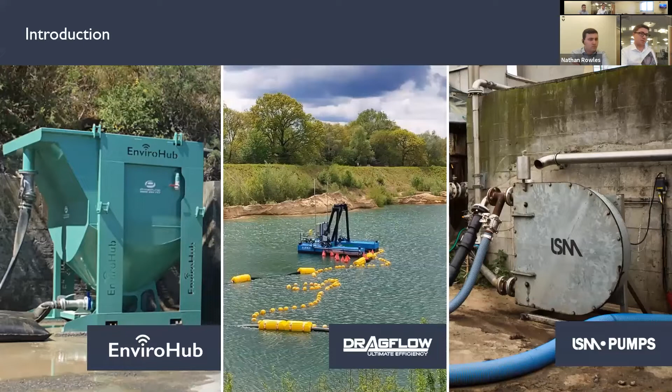So without boring you, we're just going to very quickly run through how you specify a pump. The reason we find this important is a lot of you are in a position where you go out to suppliers and make a request for a pumping solution. It's really important that you understand some of the terminology they might come back with and some of the questions they might ask, so you can understand why they're important.

Any quarry application, and I think we're in North Wales today, you've got a lot of hard rock, plenty of dewatering to be done. Pretty much any quarry, there's some movement or transfer of water, whether it's for processing or for emptying the quarry to keep it dry. But all that water, despite it being defined as clean water, is not clean.

I think we had an instance once, a quarry fitter was trying to explain to one of his colleagues how what was called clean water was actually dirty on a quarry site, and his mate refused to accept that this water was dirty because it looked clean. And I think he eventually told him, right, okay, you've got a lovely BMW M4. Why don't you pop your so-called clean water into your washer and see how you get on. And once that little experiment had taken place, it was proof that no water is clean in the quarrying industry.

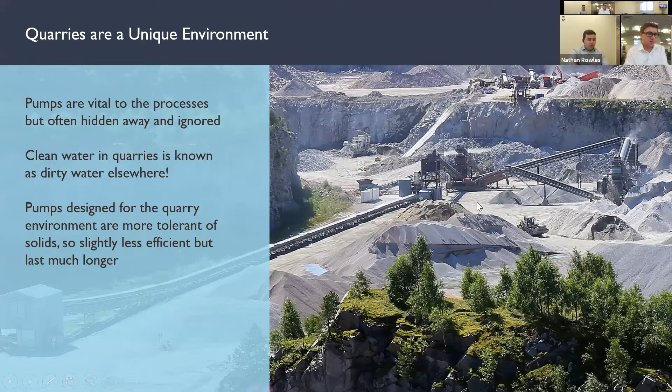There's a lot of suspended solids just from yard runoff. It may look clean on the surface, but it may just be the 10% at the bottom that, once it gets stirred up, causes the problems. But then that's the case for having the right tool for the job. It's not unmanageable by any means, it's just ensuring you've got the right tool for the job. Agreed. So with that in mind, we're going to run through quickly some general pumping principles.

We've got a very simple diagram here. On the left-hand side, let's imagine the grey area here is a lagoon or source of water. On the far right-hand side, let's imagine that's a wash plant, for example. And this is the route for the pipe run between.

One thing worth mentioning is why we run through these questions. When you ask for a freshwater pump or dewatering pump, even if we have the model number of the existing application, we're not necessarily able to just specify products based on the existing specification, because different pump models differ massively.

So we like to do this process every time. That's a really important point. So we've had instances in the past where a pump has failed on site, and the previous pump may have lasted 10, 15 years, and we go in and replace it in our innocence with a replacement pump exactly the same as the pump that's been there previously, and it only lasts 6 months, and we start to get very wound up about our quality, etc.

And then we do some more digging and realise that actually the pump had recently changed its duty or application, and the pump was no longer fit for that revised duty or application. So it's really important to go through these questions every time you do a pump, just in case something has changed.

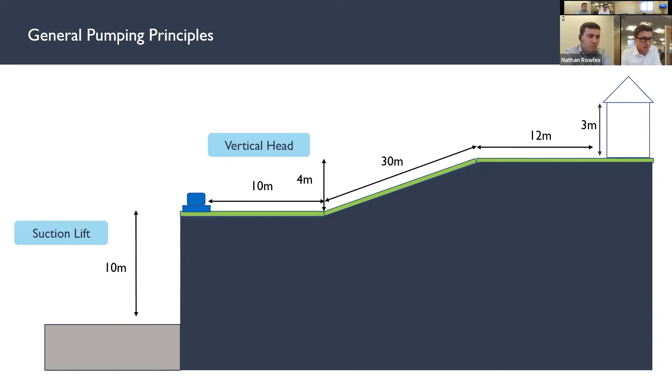So some important words and terminology that will be asked of you when you're specifying a pump. First of all, suction lift. That's the distance between the level of the pump and the level of the water. Vertical head is the vertical distance between the level of the pump and the highest point in the line. And pressure, obviously, is the pressure required at the outlet. In most cases, it's like spray bars firing onto a screen or dust suppression or something like that.

So first thing to point out here is that we put a very simple little pump there on the left-hand side, but that's not going to work. A simple rule of thumb is that any pump cannot prime greater than 7 meters. In reality, more like 5. The laws of physics say 10, but between 5 and 7 meters is the maximum you can prime in any given circumstances. So in this instance, we're going to have to put in a submersible pump, because obviously a submersible pump is submerged, there's no need to prime.

I'm just going to run through some calculations here. So the important question that you're likely to be asked is, what is your total dynamic head, or TDH? And TDH is the combination of the vertical head, so the difference between the level of the pump and the highest point in the line, the friction loss, which is the back pressure created by the movement of the water or slurry down the line, and then the pressure at the outlet.

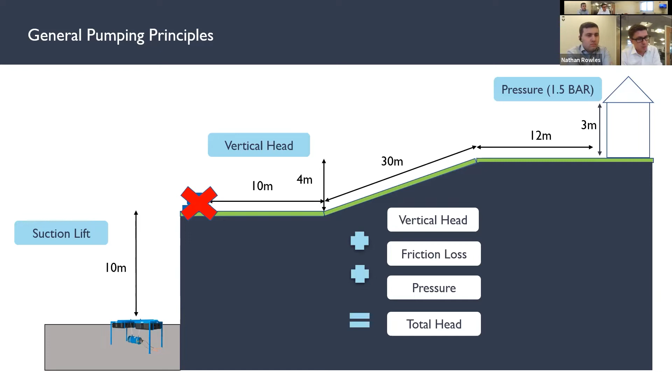That pressure point is really important because oftentimes on a sand and gravel site especially, or if you're washing quarry dust, for example, it's often forgotten the pressure that's required at the spray bars. And that's really important. A wash pump wouldn't obviously work without that. So total dynamic head is the combination of those three things. And we're just going to walk through the specifics here in this example you can see on the screen.

So vertical head is 17 meters in this instance. You've got the 10 meters up from the water level, another 4 meters up to the highest point, and 3 meters up to the top of the plant. Friction loss. There are plenty of online calculators that will help you out with this, but we'll do this for you largely. The friction loss should be, in any given circumstance, less than 10 meters. 10 meters is the maximum you really want to go to. Beyond 10 meters, you want to be looking at a bigger pipeline or a different, more efficient pump. So that's an important point.

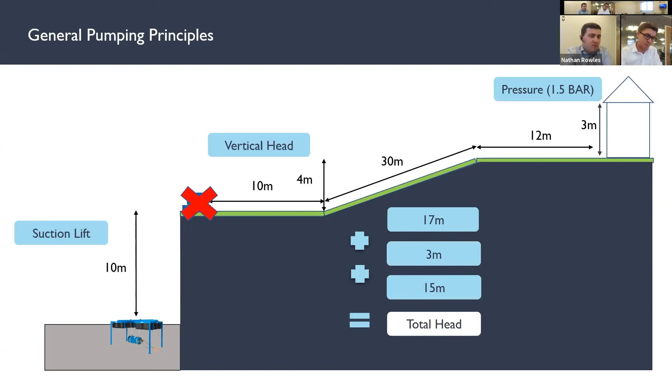The larger the flow and the smaller the pipeline, the greater the back pressure. The more pressure you have in the pipeline, especially if it's just a fairly basic Bauer connector, the quicker it's going to wear out, the quicker it's going to wear the pump out. And let's say we need pressure at the outlet of 1.5 bar. That's 1.5 bar, 15 meters, which is a total dynamic head of 35 meters. I hope this isn't teaching you all things you already know, but just good to go over this again.

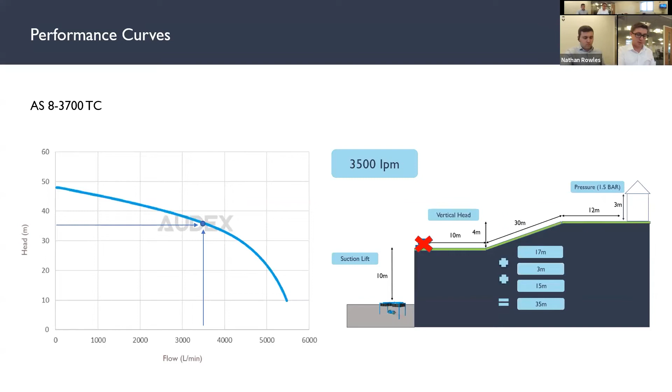Let's put up another curve there. This is an 8-inch, 37 kilowatt. Again, we'll do the same, 3,500 along the bottom, go up the side to 35 meters, and lo and behold, this meets perfectly on the curve here. In reality, in the real world, that virtually never happens. But just for the point of this presentation, that's a correctly specified pump. And you should be aiming to land in the middle 2/3 of that curve for a successful pumping application. Either side of that, you'll be poor on efficiency and poor on lifetime in the pump. So that's just some facts about specifying pumps. I just wanted to touch on that right at the start.

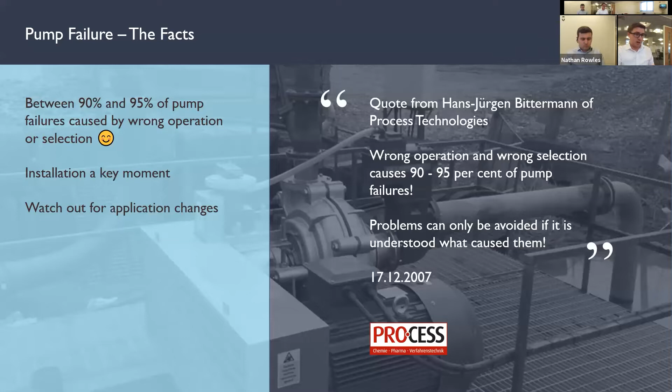Okay, so moving more on to the points about a bit of innovation in the marketplace. I wanted to touch on a few things that we've experienced in the marketplace that have been really interesting to our clients. And first of all, much more accessible, much more affordable, much faster to set up dredgers. And these have two applications really in a quarry site. We've worked closely with a company called Dragflow in Italy, help them define and establish this range. The reason why this is important is because as the processing plant is further and further away from the dig area, excavation area on the sand and gravel site, obviously the challenges of transferring that material become more and more complicated. You have various options.

You've got load and haul, which is particularly costly, and it's also not viewed very positively from an environmental perspective. Field conveyor is also very costly and also unsightly. As planning challenges become more of a thing, and as you have to develop into new areas, neighbours and planners are looking for new ways for you to work with them to continue to develop the area, maintain jobs, etc., but innovate in view of not causing issues from a planning and an environmental perspective. And dredging is one of the really clever ways you can work with them. Mike Davis is on. Obviously, we're working with him on this from a Sibelco perspective, but there'll be other sites that will be interested in this or have similar challenges.

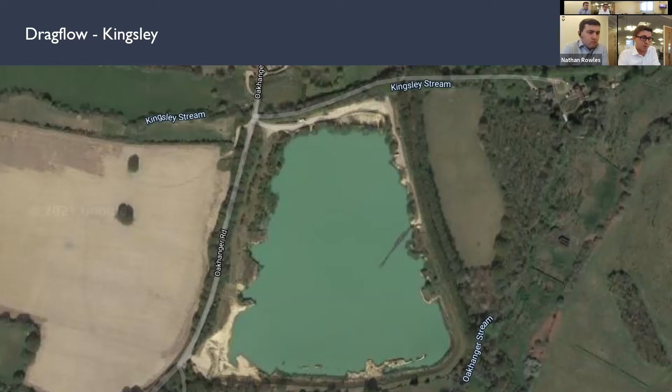They didn't want to put in place a full permanent dredging solution, which would have cost them a couple of million pounds, and on massive long lead times. Instead, they wanted to put in place a temporary solution. So we put in place the Dragflow dredger, which is a cable run dredge.

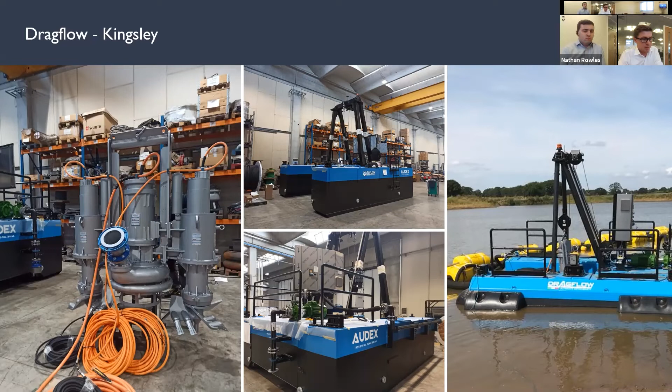It uses a pump suspended from the dredge with side cutters, as you can see on the left-hand side, a jet ring blowing fast-paced water at the excavation area to break up the material and then pump it away to the processing plant. This is a clever little system.

A system like this can be operated by one man, can pump directly to the plant, very limited human involvement, completely silent, and very limited intrusion into the surrounding area. So all you can see is the dredger. You can have a buried pipeline from the excavation area to your plant, and that could be a significant distance away. A couple of examples there.

One quarry we're talking to in Sussex is in a national park, and it's obviously a massive benefit as an alternative way to transport material there. Because obviously, any noise, sight, sound pollution is immediately picked up on in applications like that. No, that's good. That's a good point.

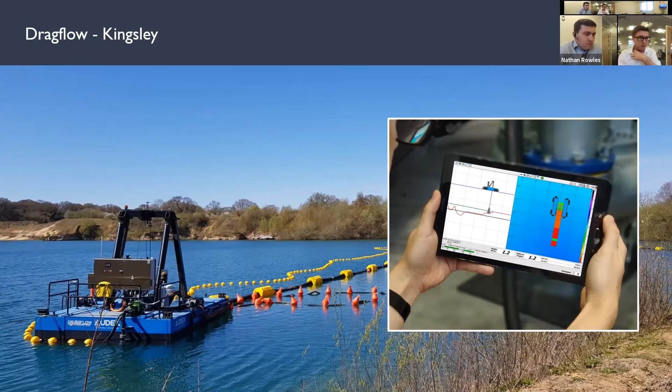So this dredger here, just for your interest, the one on the screen is doing around about 120 tonnes an hour from a location that's probably a kilometre away from the actual main processing plant, maybe slightly more. And if you've got a hydrographic survey of your own particular quarry, it maximises absolutely everything out of that dig. Yeah, you can be sure you've got everything. It's not a blind dredge as such, is it?

Yeah, and it operates basically like a robo-mow in the sense that it's controlled by two key metrics. One is the amperage on the pump itself. So if it picks up that it's no longer pumping solids, but it's pumping liquid, it will move the dredger around. And also, if it picks up that the weight has been relieved off the depth winch, it will lower the winch until it feels like it's dredged the area around it, and then move on automatically. The human intervention is just to keep track on things.

So if you keep clearing out settlement lagoons by simply clearing out a strip of it or around the edges, the effectiveness of the settlement lagoon is continually reducing. Plus it's expensive, plus it's messy and frustrating for the site. On one particular site in the south, you have long reaches causing an issue to the haul road. But also you've got the extra health and safety aspect of a man on the end of the lagoon and a big heavy machine.

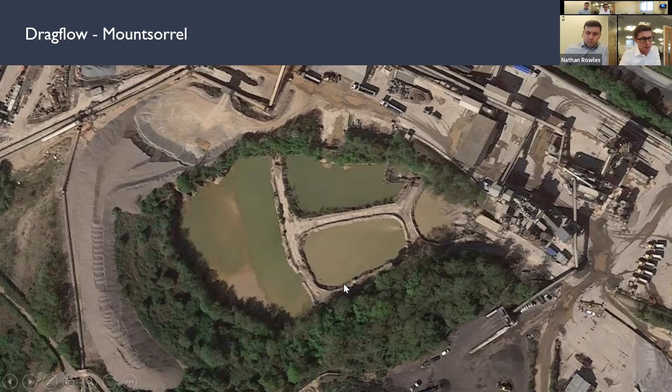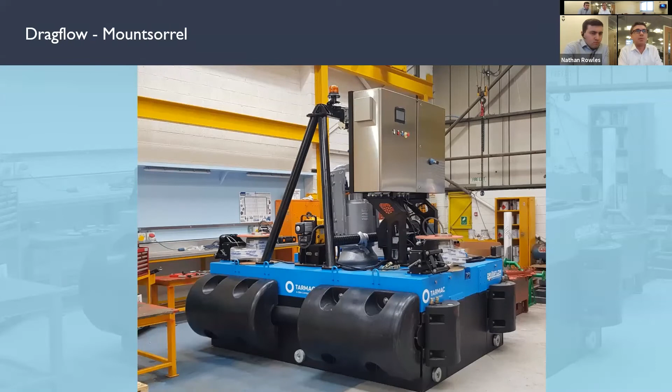In this instance, actually, Tarmac have got an improved wash plant on site, and they feel that they can get another 30% out of the product that's in the lagoons. So actually they're paying for the dredger very quickly. That's the actual dredger there for that job. So that's just dredging from a production and a silt lagoon clearance perspective. Previously, these bits of equipment would have been, as I said, expensive on long lead time and certainly not available to hire. Something that might be worth considering for any applications that you previously wouldn't have considered a dredger for.

This is going back to pumping again. What we've had a lot on sites is sites tend to struggle with pumps that have been specified by an original plant manufacturer. And what you can tend to find with a wash plant that's been installed, on accessory equipment like thickener tanks, etc., the cheapest pump available to the job has probably been specified and supplied by the OEM, not necessarily the best pump for the job. One typical application we come up against a lot is progressive cavity pumps put in thickener clarifier applications.

They will do the job and they will work, but you will typically have persistent issues with them. They're prone to clogging. They've got a mechanical seal or a gland pack seal, so after time they will start to leak, and you will end up with a lot of silt underneath your tank. That causes downtime while the area is cleaned, or extra manpower. They're quite difficult to maintain. They're not the easiest pump to repair, and they're not the easiest pump to get hold of spares for. You can typically wait a long lead time for them. The reason they're put in, obviously, is because it's probably cheaper for the OEM to put it in, and they don't have to worry about the ongoing maintenance. So in this application, it's important to get the right technology.

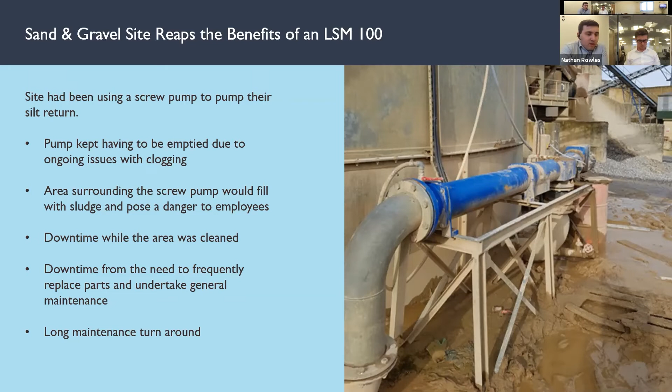So if we move to the next slide, you see something like a peristaltic pump. The beauty of these types of pumps is they're very, very low energy consumption. They're very easy to maintain. They don't have a seal as such, so you negate the leakage factor. Also helps keep your site clean. They've got the ability to run dry, so if you do run out of material, they're not going to blow up on you. And they're reversible, so with the clogging issue, if you do get a blockage in the pipeline, which is not unknown to silt pipes, you can reverse the pump the other way, either suck it out or blow it out if it's before the pump.

And they can handle a higher percentage of solids than a typical progressive cavity pump can, which has several benefits. It means you don't have to water it down after the tank, but also if you've got a filter press beyond that, pumping a thicker percentage of solids obviously helps with that filtration process at the end and can reduce press times. And again, they're able to pass large solids. Typically, it's a bigger investment, but that's a typical example that we find day in, day out on quarries where they're struggling. And it's just a case of putting the right technology in the right place. Lives can be made a lot easier.

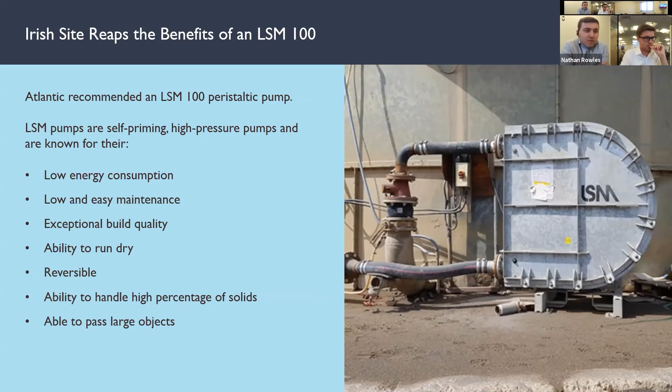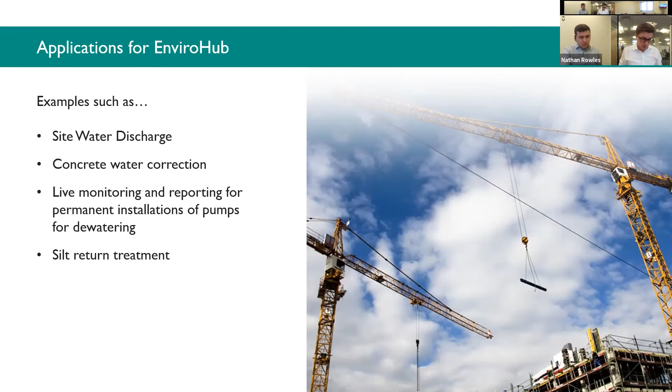So just going to touch on the site water discharge side of things under our brand at EnviroHub. As mentioned at the start, this is something that the EA are getting hotter and hotter on. Anyone that's discharging any level of water off-site for longer than a 3-month period now requires a permit to ensure they're compliant. That permit will come in various ways. It might be a standard permit from the EA that simply says you're now permitted to discharge off-site, or they might say you have one of several parameters in place to be able to hit to comply. For example, solids percentage or solids turbidity, pH, or within a limited flow rate.

It's obviously becoming a much bigger thing for inner city concrete plants, and also anyone that's operating in any area of special scientific interest, a triple SI or any of those areas that are protected areas, and the penalties and fines relating to this are becoming more and more significant.

Now, there's a really key point that I'd like to touch on here that has changed in the last 6 months in relation to EA permitting and compliance and also fines, is that previously the EA would talk to you, and if you had a breach, they would assume almost a best case scenario that breach had only just happened and that's the first breach, if you had a breach reported.

However, now their assumption is that if they have reports of a breach, they will assume that you have been in breach until a period that you can demonstrate that you weren't in breach. So, for example, if you were doing monthly testing or quarterly testing or whatever, you'd be assumed to be in breach until the last time you tested and weren't in breach. So that's a really important point from a site discharge perspective.

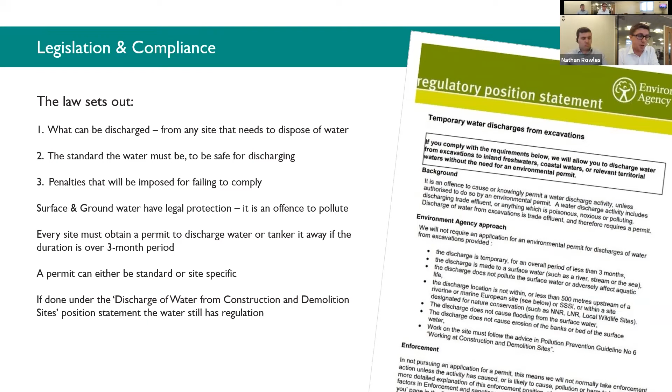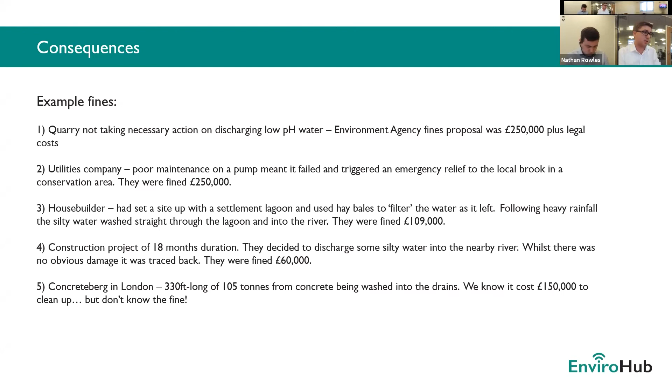And the Environment Agency are really starting to promote the idea of live monitoring discharge, which I'll come on to shortly. Just some examples, you all know this, but some examples of the fines that are out there. We worked with a particular site down south that had previously received over £250,000 fine for discharging consistently low pH water, and this is something that's not going away. Look down that list, there's plenty of other examples. It's not a one-off. It's a consistent issue, and it's taking more and more of the Environment Agency's time.

So we developed this range, similar to, you may have come across the Siltbuster range. We developed this range of products to work with sites to be able to help them with these problems. A lot of the applications we'll be going into would be in the construction market. However, the quarry market, particularly for any ongoing discharge, is certainly where this range is applicable.

I was going to show you the lamella tanks. These are for treating solids on a site discharge. For example, if you had a dewatering application from a quarry bottom and you are consistently getting solids in there and you needed to treat those solids to bring them within the EA permit, or for example, if you were on a concrete site and you wanted to reuse water from a washout application.

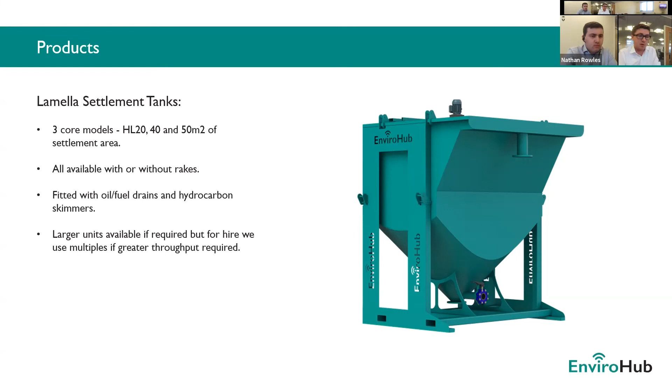For example, we've just done a job for another site where we've helped them, on an asphalt site, to be able to reuse the water they use to wash down the back of a truck to stop them having to discharge at all. And within that, they have to treat the solids. So this is a lamella system where you operate a series of plates and the water flows over them and separates the solids out quickly and effectively.

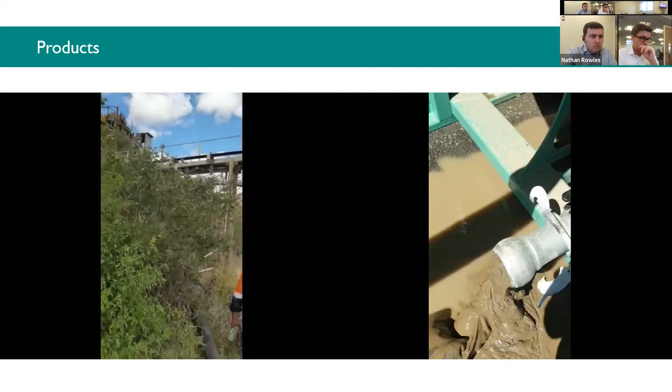If you look on the left-hand side, we've got a little video coming up. It shows the effectiveness of the system turning a very brown, mucky water into a visibly clean water. And then on the right-hand side, you'll see what the product looks like coming out the bottom of the lamella.

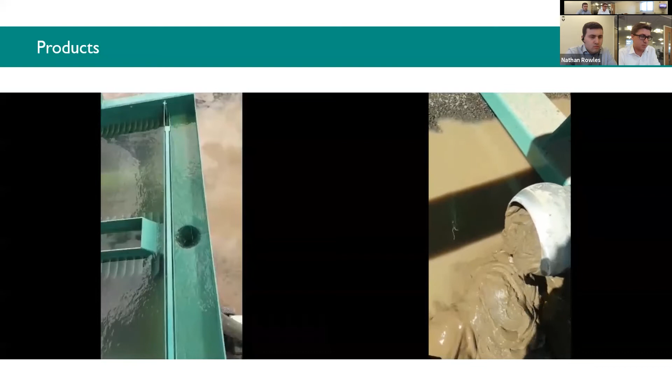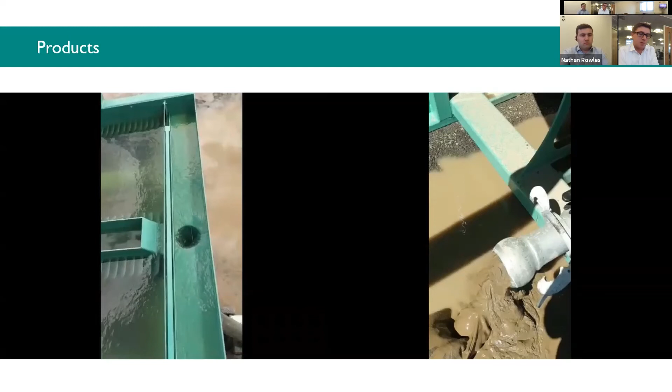The importance of this is that you can reduce the amount of lagoon space if you're using this from a water treatment perspective as part of your circuit, but also in a very small area you can treat pretty heavy solids into a clean water and compliant discharge, which is particularly appropriate for, as I said, concrete sites or inner city sites that have got limited space. I'm just going to flick through these because they're a bit detailed, but obviously pH correction is really important. That's something that we work with sites to do as well.

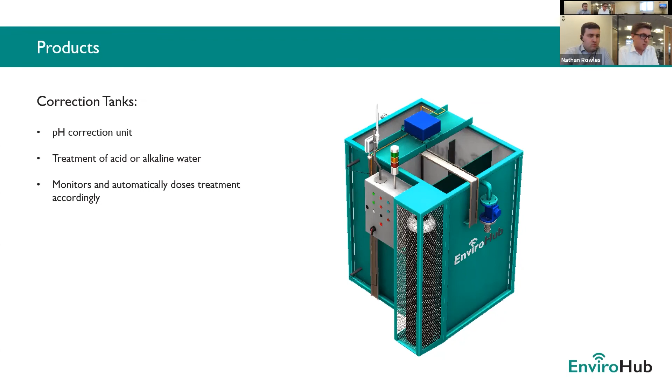But the one thing I really wanted to talk to you about on this, conscious of the time, is live monitoring. Now, as I said, it's becoming more and more important from an EA perspective. And previously, live monitoring of discharge, or any flow around site reporting online, has been very, very costly, and it's been avoided because it involved a huge amount of work to install, running cable runs, all that sort of thing. We have a system which is an option, which we've put into a number of sites.

In fact, I don't know where it falls into North Wales, but we've just put a couple of these systems into Tarmac Dolyhir, where we are measuring live flow, pH, and solid content. Now, where this is different to any previous solution is that it doesn't use phone signals to transfer the data to the cloud. It uses low frequency radio waves to a gateway on site, meaning that you're not reliant on a SIM card, for example, which on a lot of quarry sites doesn't work. It uses next to no power.

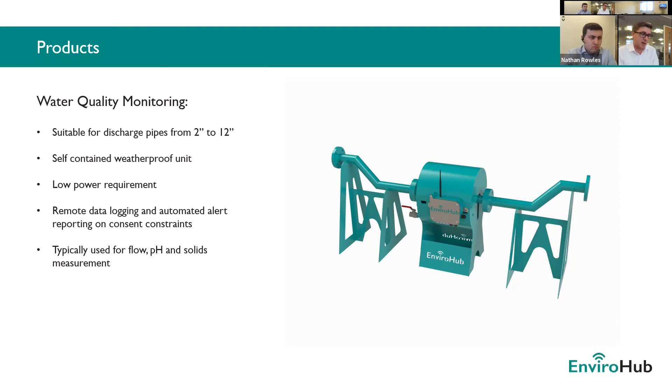You can run it on a very small solar panel, and it gives you the ability to log online, for example, as you can see on the screen here now, any live data. And within that, you can set up warnings and alerts, and we run on a traffic light system. So, for example, if you were all good and within your permits, it would be green.

If you were approaching the soft limits of any of your parameters within your permits, it would be amber. And obviously, if you breached any of those parameters, it would go red, and it would text you or email you and alert you, or automatically shut off a valve, shut off a pump, divert the flow, etc. The system has got the capability to do all that inside one very cost-effective solution.

And also, unlike any other system that's been put forward before, there's not a massive ongoing cost to this. Very, very low cost. And what's more, we've spoken to the Environment Agency about this product range, and they're very happy about the demonstration for using this portal and these live reports. You can print off a weekly or a monthly report to demonstrate to them that you've been compliant over a period of time.

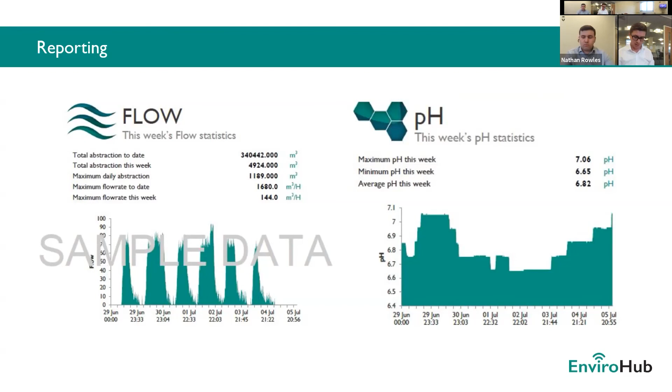Now, I've flown through that latter section quite fast. Got lots more I could go through, but conscious that we're running quite a bit over time. So I'd be glad to answer any questions, Mark. I hope that's been useful.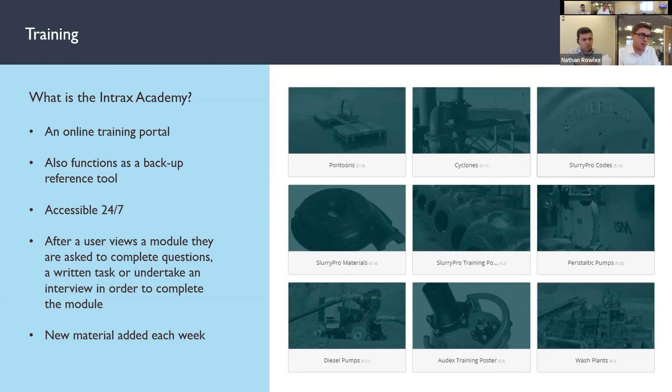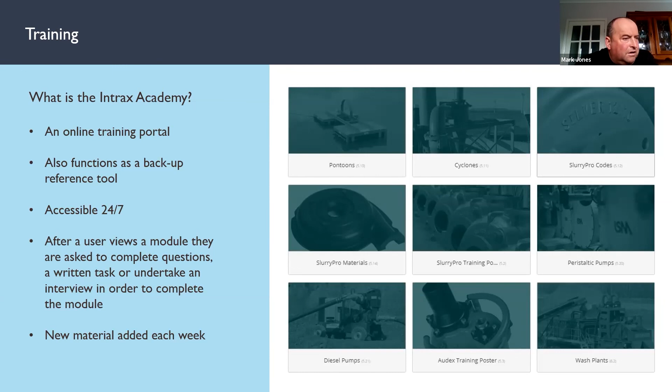That's great, guys. Thank you for that. Has anybody got any questions? Nathan, it's Mike Davis from Svelco. Just a quick question on your Enviro Hub. Does that actually do turbidity as well? Correct, yeah. So it will measure turbidity? Yeah, so it measures turbidity as part of the process, and then you could record that online, live. The three key things are flow, turbidity, and pH. Yeah. That's monitoring. So you've got like a threefold information strand coming through.

If I can ask a question, Stephen Cross from Hanson. With the Dragflow dredger, you mentioned 120 tonne an hour. Is that solids movement or solids and water? No, that's actual solids movement. Yeah, so you might have a flow rate that's substantially higher than that. You probably find you're operating around about 600, 700 metres cubed an hour in terms of flow rate. But yeah, 120 tonnes an hour of production.

And what sort of range is that for that type of machine? What's the minimum and maximum? You know, if you're moving silt, that would be sort of a temporary or a small one, I guess. Yeah, so there's a range of products within that range. The smallest unit, for example, I should have mentioned this, but the Mountsorrel one I showed you on the screen, that's an 80, that does about 18 tonnes an hour. There's a 50 tonne an hour module, and there's a 100, I think they're 150 tonne an hour, isn't there? Yeah. So there's definitely the smaller end and the larger end.